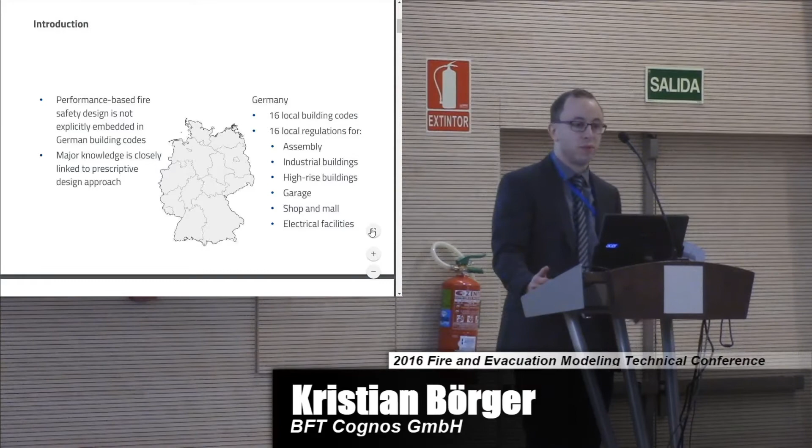In the individual German federal states, there are independent building codes, so we have a total of 16 building regulations for assembly, industrial buildings, garages, shops and malls, and electrical facilities, for example. But in Germany, performance-based design methods are not explicitly embedded into the building codes. According to this, major knowledge about material and product performance is closely linked to a prescriptive design approach. This approach has provided a substantial improvement in fire assessment, but however the increasing individuality and complexity of modern buildings may conflict with these requirements. So performance-based design has been established in Germany as well.

Up to now, the directive for industrial buildings is the only performance-based design approach in Germany right now. Usually the fire protection requirements in line with building regulations are met by selecting verified structural elements and technical firefighting measures, for example. Due to the lack of calculation methods and performance criteria or acceptance criteria, the German Fire Protection Association decided to issue a guideline to harmonize disjointed approaches and assumptions and to avoid errors from the application of engineering methods.

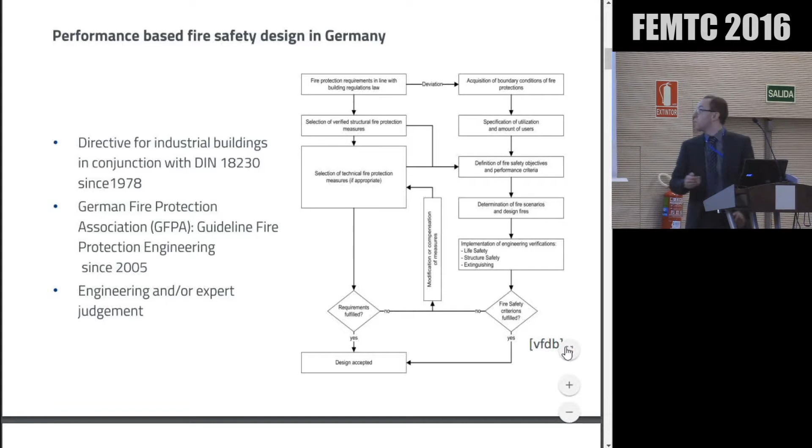In the year 2008, the DIN Working Committee Brandschutzingenieurverfahren, which is fire safety engineering in English, started its work to standardize fire safety engineering methods in Germany. As a result of this, the first issue of DIN 18009 Part 1 was released in September of this year.

This is intended to be a basic document which describes the necessary terms and definitions related to the design process and the methodologies in fire safety engineering. Part 2 of DIN 18009 covers evacuation modeling and life safety assessment in case of fire. And Part 3 is about the identification and selection of design fire scenarios, with a special focus on the selection of fire models like CFD models, zone models, and so on. Part 2 has been issued as a draft, but Part 3 is actually in progress.

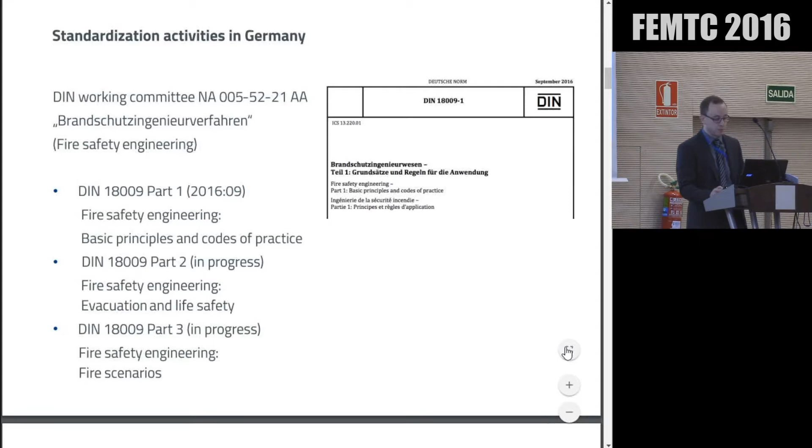A performance-based design approach in general may be required if compliance with fire safety goals according to building regulations law is not possible by fulfilling prescriptive requirements. If the evidence is to be provided by a fire safety simulation in terms of a performance-based design, there have to be performance criteria. The guideline to fire protection engineering in Germany gives examples of how we can derive functional requirements from the fire safety goals, which in turn can be quantified by performance criteria for further consideration.

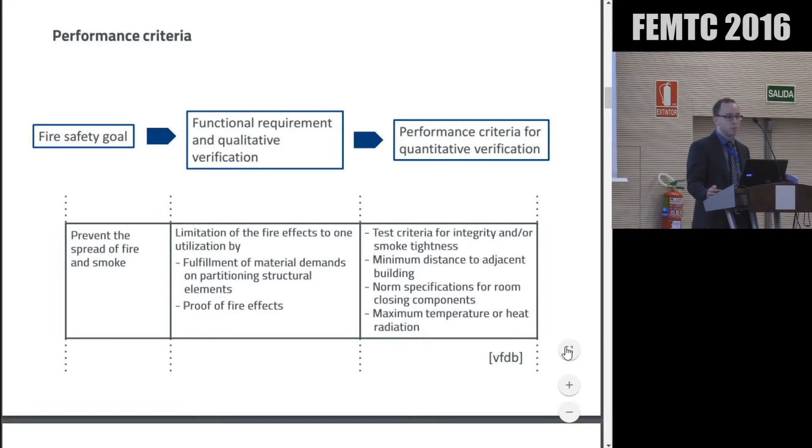For example, if our fire safety goal is preventing the spread of fire and smoke, the functional requirement derived from it is the fulfillment of material demands on partitioning elements, and our performance criteria derived from this can be a maximum temperature or heat radiation to the respective component.

The evidence of performance-based design is usually provided by comparing the defined performance criteria on the resistance side with the calculated results on the action side. The influencing variables must be selected on sufficiently conservative assumptions. Uncertainties at this point have to be taken into account by calculating partial safety factors, or these partial factors can be taken from appropriate standards or calculated within a safety concept.

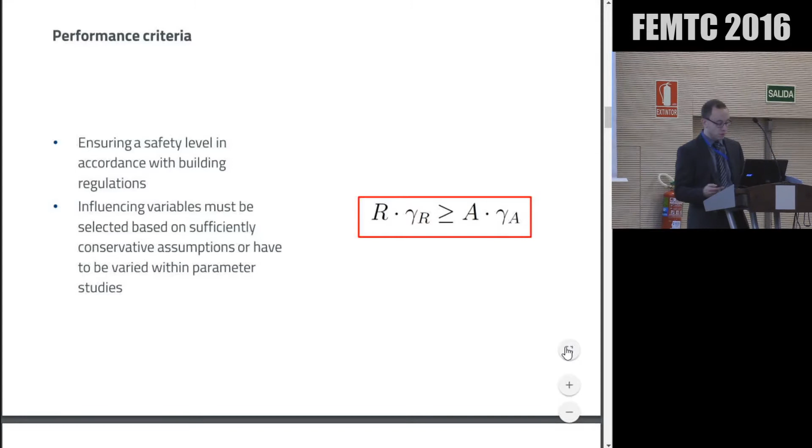I'll now turn in a bit more detail to the principles of the description of fire scenarios. In general terms, a fire scenario describes the boundary conditions as well as a sequence of all influences that affect the fire development. It should be noted that the possible key events have to be taken in a temporal context in order to avoid the definition of unrealistic scenarios.

So a basic procedure for this selection of fire scenarios is given in DIN 18009 part 1. So we have the steps: at first, the identification of fire scenarios based on the building utilization. Then we have the definition of critical sites for the fire, the determination of the effects of factors that influence the fire, the determination of the influence of the building users, what may influence a fire. Then we have the assessment of the fire risk. Before that, we have the assessment of the fire losses, of course. And last, we have the selection and documentation of the fire scenarios.

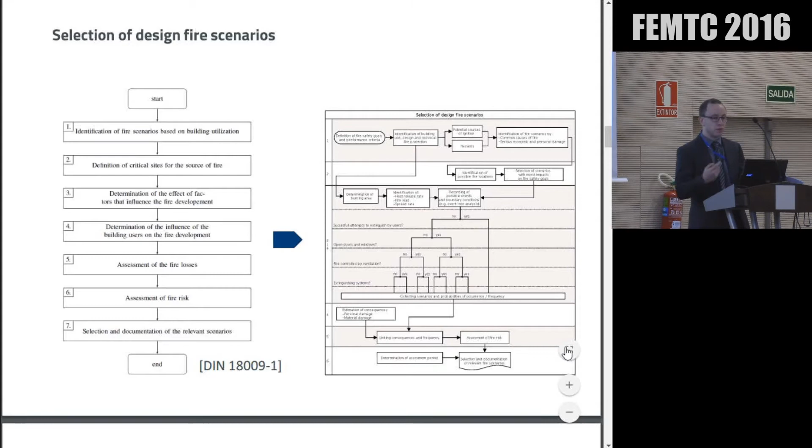I would now like to take a closer look at these above steps by giving an example of how a workflow may work. So at first, all the fire safety goals and the performance criteria have to be defined to recognize possible hazards. So with regard to the performance criteria, those scenarios have to be identified with common causes of fire as well as scenarios which result in a serious economic and personal damage.

For the individual scenarios, different places, different sites for the fire to occur have to be considered. So for example, to verify a successful design, from these sites, those with the worst impact on the fire safety goal have to be taken into account. So for example, if you want to verify that a safe escape from a building is possible, you have to take into account the scenarios within the escape routes, or maybe scenarios which make escape routes impassable.

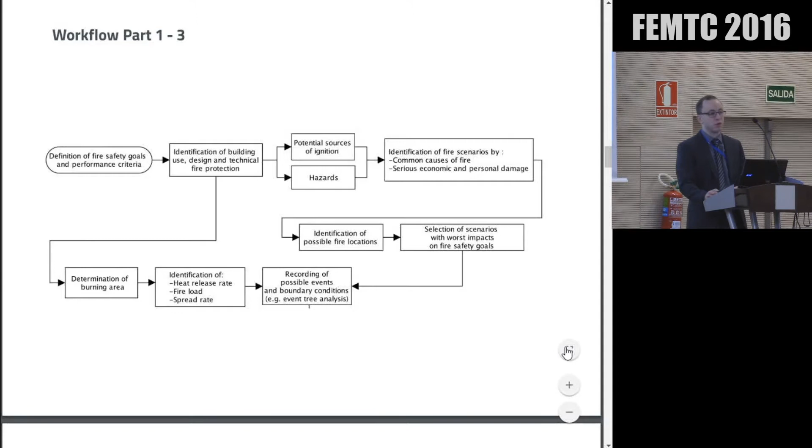So if all these variables have been collected within a qualitative analysis, we now have to take a closer look at the events that may occur during the fire development. So the fire development can be influenced by structural as well as geometrical circumstances. So we have to determine a burning area. This can be done by having a closer look at the arrangement, maybe, of room closing components so that we can reduce the fire to one area. Also very important is getting information about the ventilation conditions, maybe by having a look at the windows, the doors, and the smoke extraction respective their opening criteria. And in a similar way, we can define the influence of technical firefighting measures like automatic extinguishing systems that maybe influence the heat release rate we want to calculate.

On the other hand, we have to determine the influence by the building users on the fire development. From the type of usage of the building, you usually can estimate some factors like the probability of causing a fire maybe by the users, or the reaction of the building users by detecting a fire by themselves or by getting alarmed, and you also can predict the probability of a successful extinguishing attempt maybe. Since some of the factors are subject to very large scatter, they have to be taken into account by appropriate safety factors also. But you also can maybe develop event trees like this to consider all thinkable scenarios.

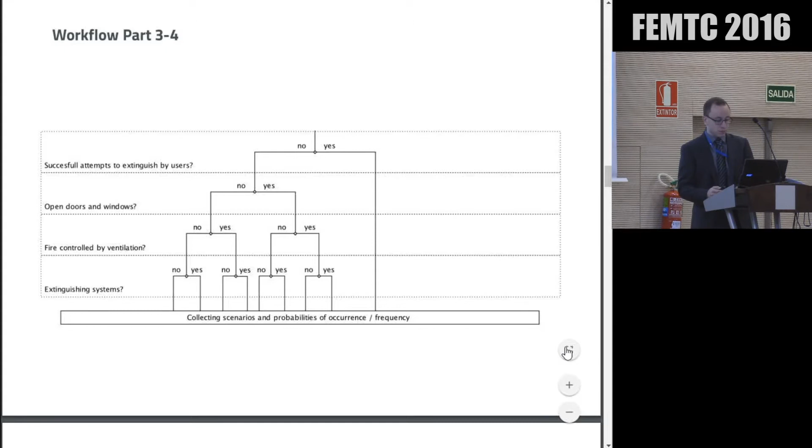So the next step: the possible fire scenarios and the probabilities of occurrence for the scenarios have to be selected, and they must be linked with the estimated fire losses. The fire losses may be estimated by the definition, or the estimation, of personal damage or maybe material damage. If you link these probabilities of occurrence and the fire losses, you get the fire risk. It's defined as the product of both.

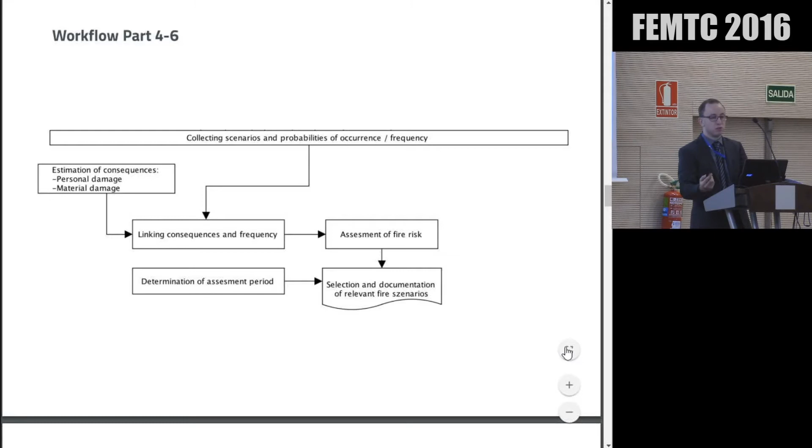But it should be clear that the identification and the definition of the design fire scenarios operates in a mutual interaction with the subsequent fire simulation, so that the entire process should be regarded as an iterative procedure. So maybe if you want to take into account the effect of an automatic fire extinguishing system, you first have to define a fire in order to maybe calculate the triggering time of the system. So the scenario-based design may be explained best on the shown graph. It's taken from DIN 18009 part 1. So for a defined assessment period, which usually is the service lifetime of the building, all possible scenarios have to be collected with their respective risk.

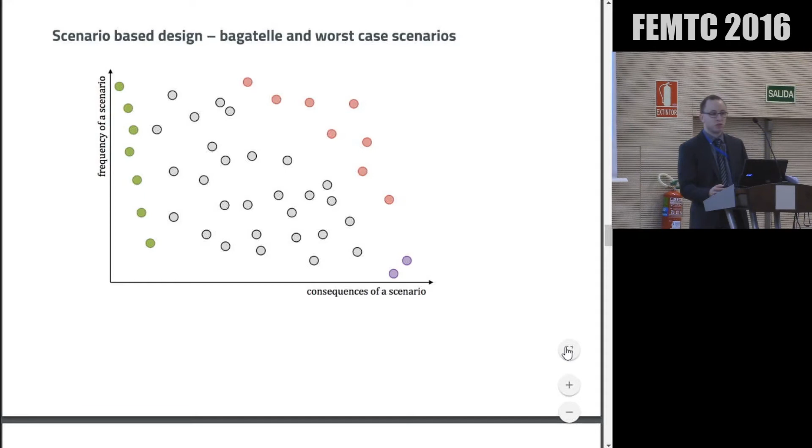So in the first step, the individual scenarios can be grouped into maybe bagatelle scenarios that have a negligible effect regarding the respective fire safety goal. So the probability of occurrence for these scenarios may be of rather subordinate importance. Then there are worst case scenarios, those ones which may result in high fire losses, but are also quite unlikely to occur. So we don't have to consider them either.

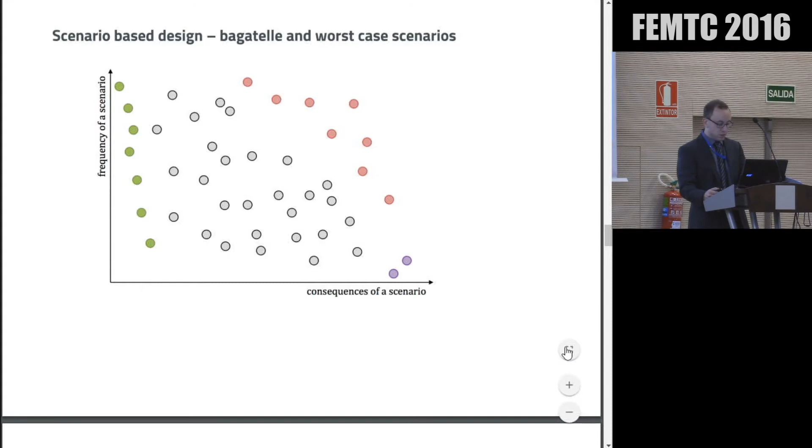And then we have scenarios with a high risk, which are also not important to have a look at because they are unacceptable, which means they have to be eliminated within a redesign of the fire protection concept. So the remaining scenarios now form the relevant scenarios, from which significant scenarios have to be grouped into clusters. This may be done by acceptance criteria. And from the respective clusters, now design fire scenarios have to be determined. You can take one scenario of the respective cluster, or maybe you can develop a new scenario which is representative for the cluster.

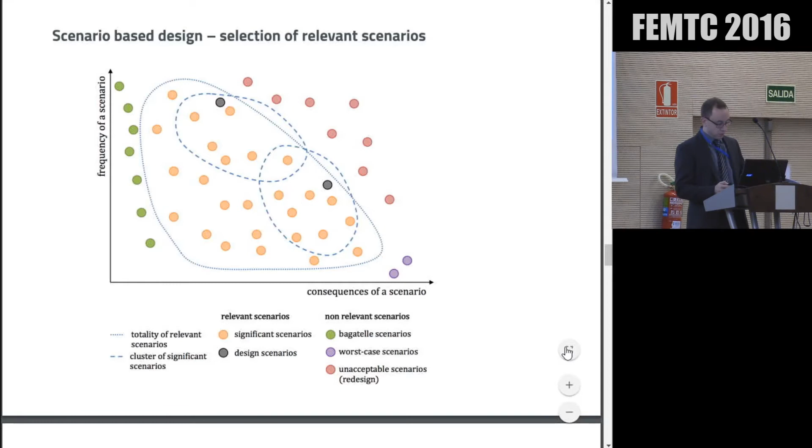So before we go more into detail regarding fire modeling, we again need to keep in mind the difference between the fire scenarios and the design fire. The fire scenario, as I already said, describes the circumstances and the sequence of all influences during the fire, whereas the design fire is a quantitative description of the fire within this scenario.

So for many fire protection verifications, a square increase in heat release with a constant fully developed phase and a linear decay stage is a suitable approach. These models are usually described by maybe a maximum burning surface, a fire load density, a spread rate, and so on. So additionally, we have to take into account, regarding the fire safety goal to be achieved, maybe a detailed combustion reaction in order to take into account combustion products or soot.

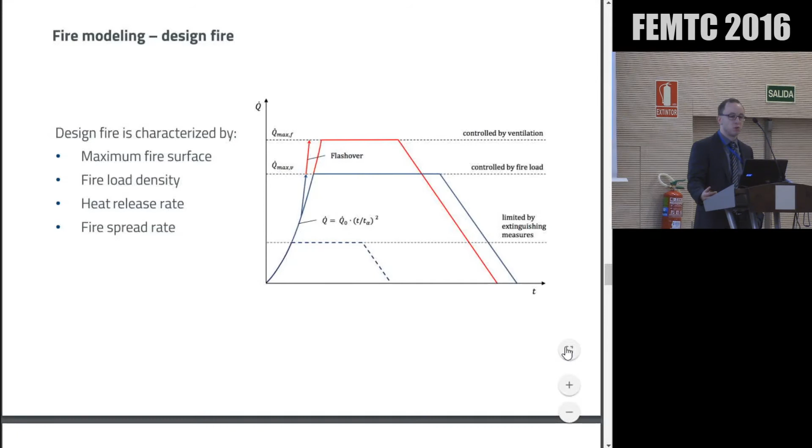So the following application example should give you an insight into the process of the selection of fire scenarios. It has been decided not to do a comprehensive risk analysis because it's not suitable for this rather simple case. So the example shows a 3-story building in a solid construction. You have a lobby, a restaurant, and office units at the ground floor, and the first and the second floor, which are rather similar in construction, have offices and meeting rooms.

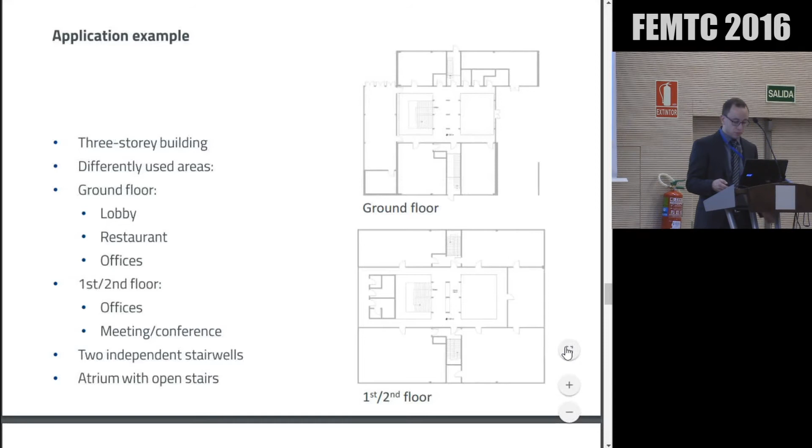And what is important for the next step is to consider the roof structure of the building, which is designed as an unprotected steel frame, and the roof structure forms a bracing element of the overall structure of the building. So for the considered building, the following fire safety goals can be derived from the German Model Building Code. We have: prevent the fire from starting, prevent the spread of fire and smoke, enabling of escape and rescue, and enabling effective firefighting measures.

Since some of these stated objectives cannot be achieved just by fulfilling prescriptive requirements, an equivalent level of safety has to be ensured by a performance-based design. So let's have a closer look at the last of the stated objectives. In order to enable effective firefighting, we have to ensure a sufficient stability of the load-bearing structure, so at least 90 minutes of ISO fire. This cannot be guaranteed by the structure without further evidence.

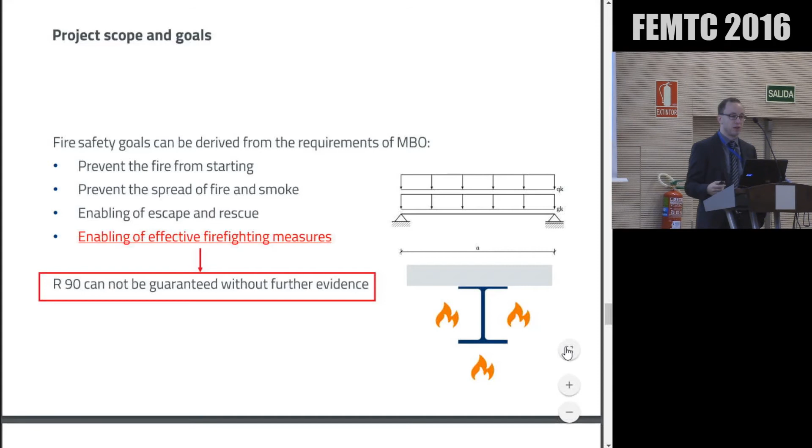Now the evidence should be provided by a structural analysis in fire, based on natural fire according to Eurocode 1. So in Germany, the proof of an adequate stability in case of fire is provided if a failure of the structure does not occur during the entire process of the fire, including the decay stage. To identify possible sources of ignition for the building, the utilization of the building is of major importance. In this case, we could identify maybe defective electrical equipment, computers or kitchen equipment as possible sources of ignition. So essentially all of the individual office units as well as the restaurant and the lobby have to be considered as potential areas for a fire.

But with regard to the fire safety goal to be achieved, only those scenarios must be considered which result in a high thermal load on the load-bearing structure. So the closer examination in this case can be reduced to a fire event on one of the office units on the second floor. So on this floor, a total of 3 areas that are formed by room closing components can be considered as potential places for a fire.

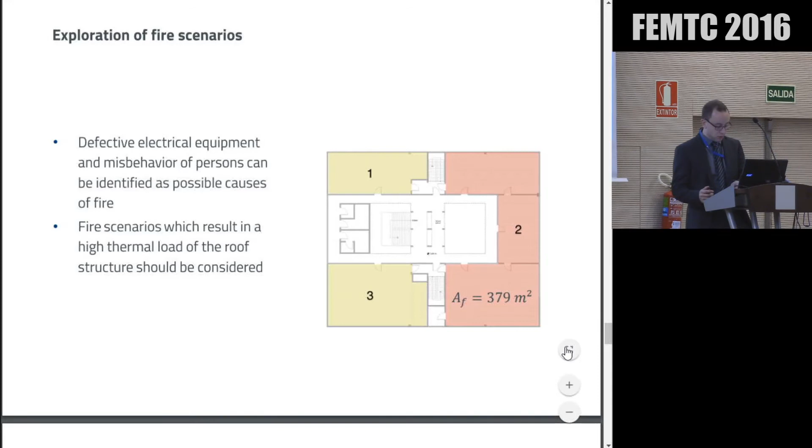So since the probability of occurrence is comparable for 3 office units, the risk analysis at this point is limited to selecting a fire event with the greatest impact, which obviously is a fire in the greatest unit, taking into account also the ventilation conditions. So taking into account uncertainties and failure probabilities of human and technical nature is covered by the national annex of Eurocode 1, by the safety concept of the national annex.

So for an office utilization, the annual probability of occurrence for an initial fire can be determined or assumed to be 6.2 by 10 to the power of -3. So this value can be either taken from tables or maybe can be calculated depending on the building or the unit's area. Furthermore, the probability of failure for firefighting measures as well as firefighting measures by the user, by the fire brigade or by maybe an existing extinguishing system could be considered with the shown values. So we get an entire probability of occurrence for destructive fire in the utilization unit.

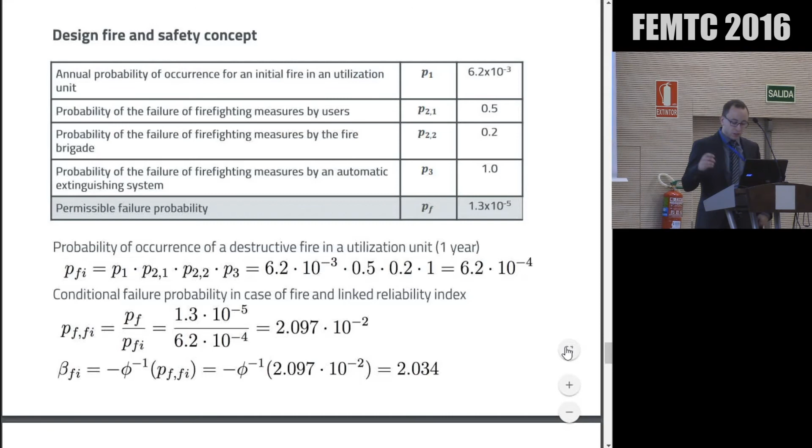So in conjunction then with the permissible failure probability, we get a conditional failure probability as well as a linked reliability index, which can be calculated using the inverse function of the standard normal distribution at this point. So by using different variation coefficients, we now can calculate the partial safety factors for the heat release rate, which is 0.986, and for the fire load density, which is 0.981.

So finally, taking into account the partial safety factors, we can calculate the design values for the fire load density as well as the heat release rate. These input parameters we need to calculate the design values are given as 90% quantile in Eurocode 1, which means they will not be exceeded by an actual fire with a probability of 90%. So in consideration of a spread rate, I think it was 300 seconds up to reaching 1 megawatt in this case, and maybe taking into account flashover criteria, we now can precisely describe our heat release rate curve for the further consideration.

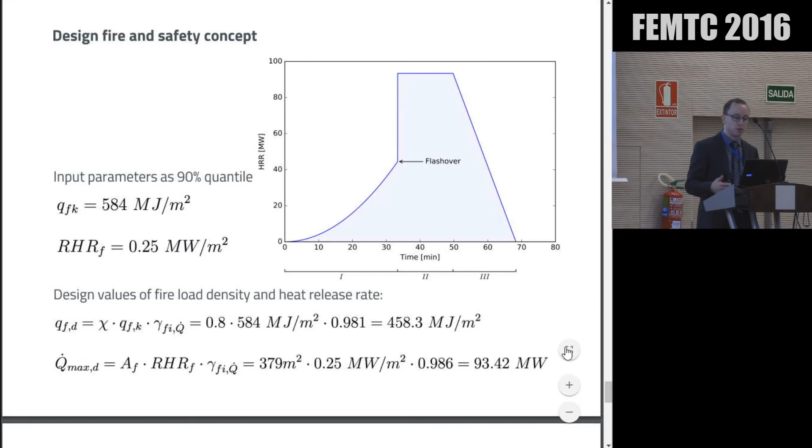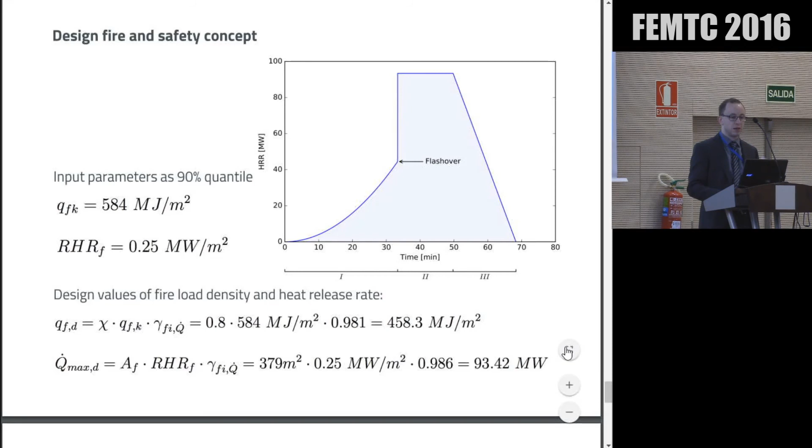But at this point, I'd like to set aside the subsequent structural analysis, because this example was aimed to show the way how the fire scenarios should be selected. So I will now close my presentation with a short outlook and conclusion. So the recently published part 1 of DIN 18009 already describes the fundamentals of selecting design fire scenarios, but especially when it comes to the point where we have to select the relevant scenarios from the totality of possible scenarios, there are some values missing. Maybe we have missing acceptance criteria which line the border for what scenarios do we have to select and what we don't have to select.

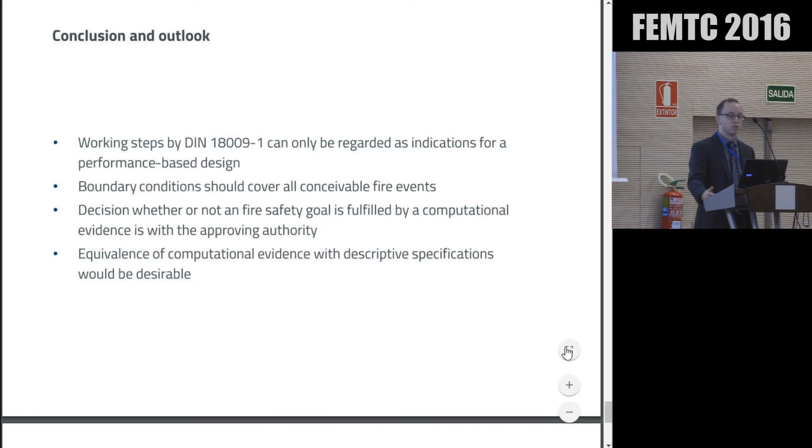So for similar reasons, the application of performance-based design methods in Germany is quite different at some points, because the decision whether a fire safety goal is provided by a computational evidence is still with the approving authority. So maybe if you want to do a structural analysis in case of fire using a natural fire, this always is a deviation from building regulations law. So at this point, it would be desirable to get an equivalence of a computational evidence with the prescriptive requirements from building regulations law. So thank you for your attention.

We have time for a question if there's any here.

Yeah. DIN standards in Germany are elaborated by an aggregation of interests. So they are highly controversial. You told us that to choose the right fire scenario, you have to link consequences and frequency. But in Germany, there are absolutely no statistics about fires. So how does this get together? And this is one of the biggest points in Germany at the moment.

So yeah, it's exactly what I said last. There are acceptance criteria missing to say what scenarios have to be considered and what scenarios don't have to be considered. That's exactly the point. Because this paper gives us lots of data where nobody really knows where these numbers come from. Yes.